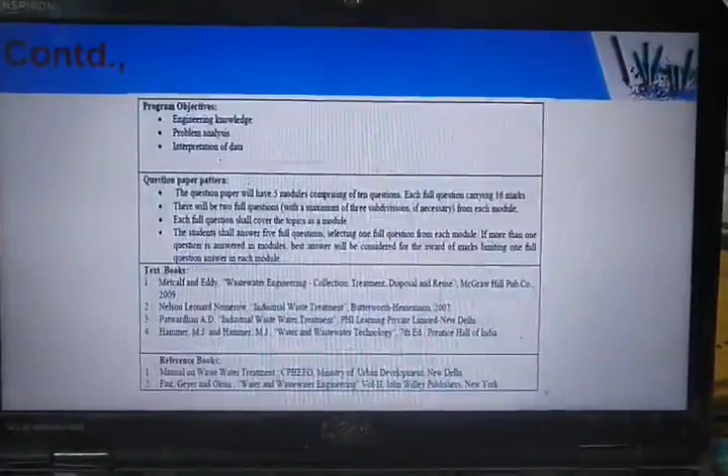Okay, so anyway, to begin with, in the previous class we have had an introduction about municipal and industrial wastewater engineering and some of the terms associated with municipal and industrial waste, the syllabus outline, the course objectives and outcomes. And we have gone through some of the basic definitions which are used in this subject. Just to have a quick review.

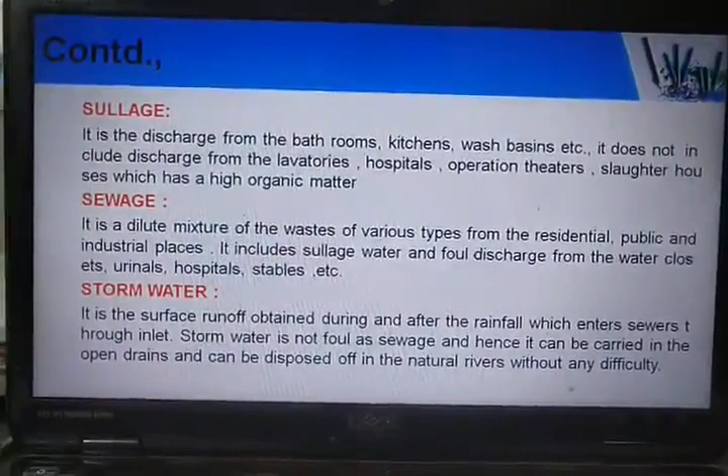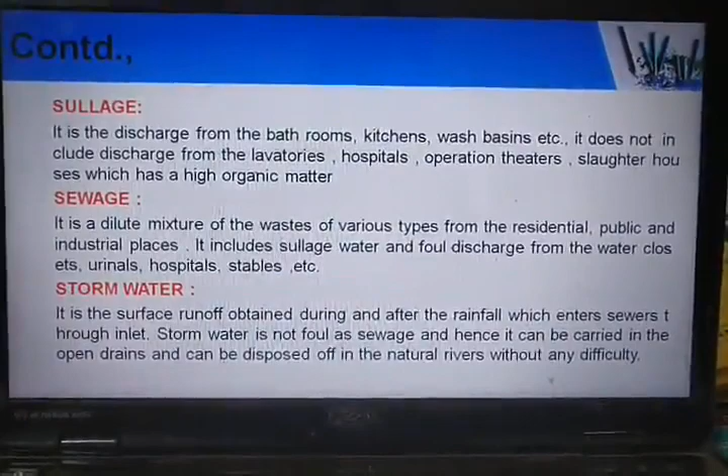Sullage, sewage and stormwater, you should know the difference between all these terms. Sullage is the wastewater which gets discharged from bathrooms, kitchens, wash basins, etc. Remember, it will not include any human and animal waste. Sewage is a dilute mixture of wastes of various types of residential, public and industrial places. It also includes the sullage water and foul discharge from the water closets, urinals, hospital waste, etc.

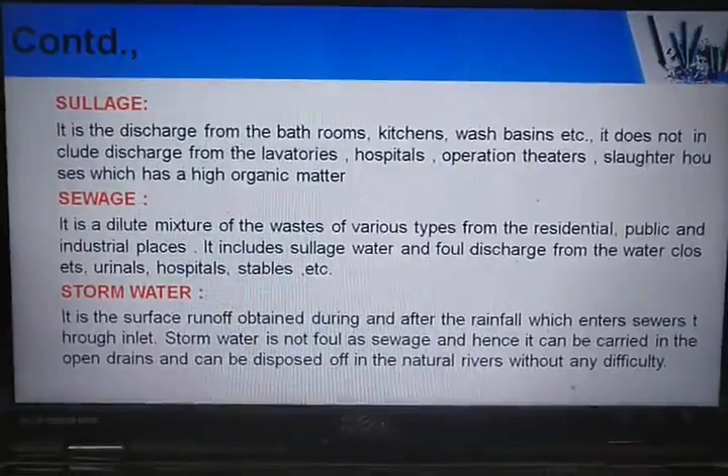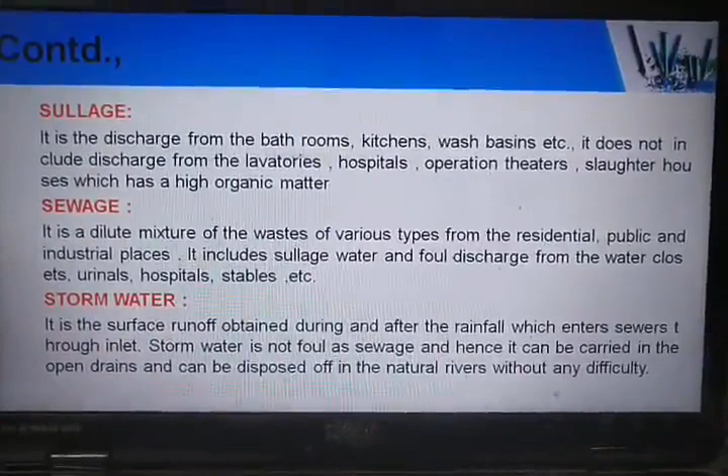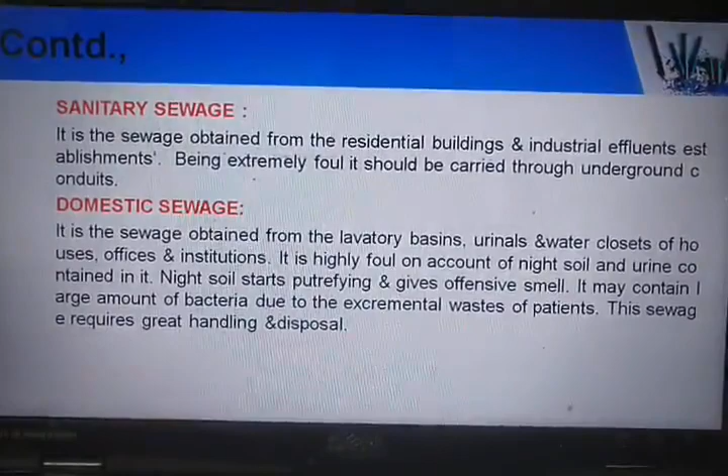Storm water is nothing but the rainwater which falls on the surface, and that has to be carried out using the stormwater sewers for its disposal. It will not contain any foul matter unless it gets mixed with the sewage. Another term is called sanitary sewage. It is the sewage obtained from residential buildings and industrial establishments, and it is extremely foul and it should be carried through underground sewage conduits only.

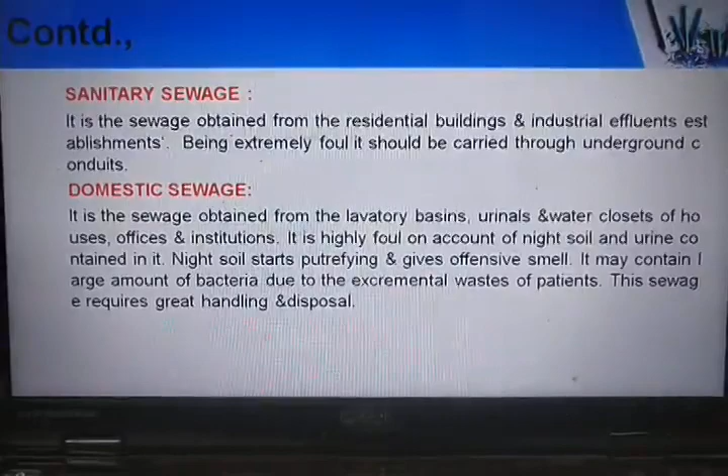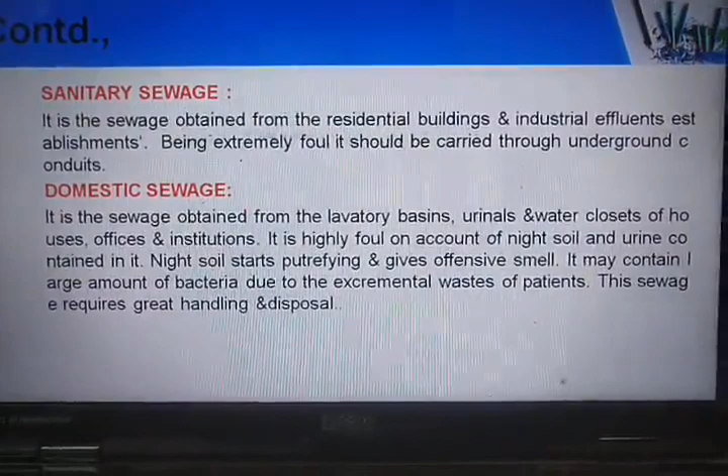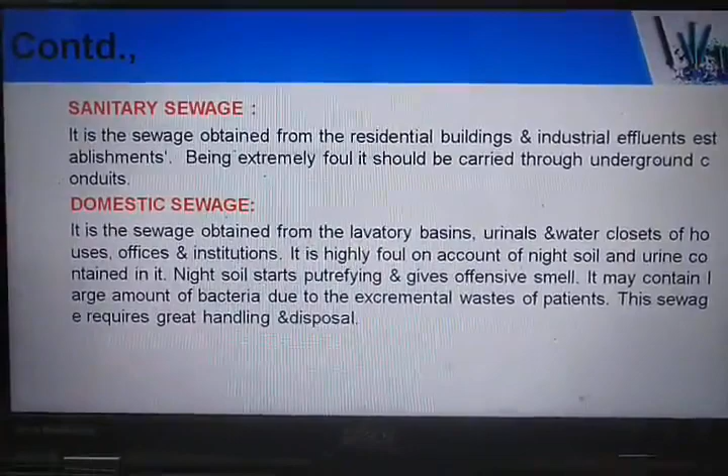Like I told you, the sewage or industrial wastewater is categorized based on the parameters or the organic load, how much load or pollutants it contains. It contains various physical, chemical and biological impurities. So based on that, the sewage has to be handled and treated carefully by following the norms of the pollution control boards.

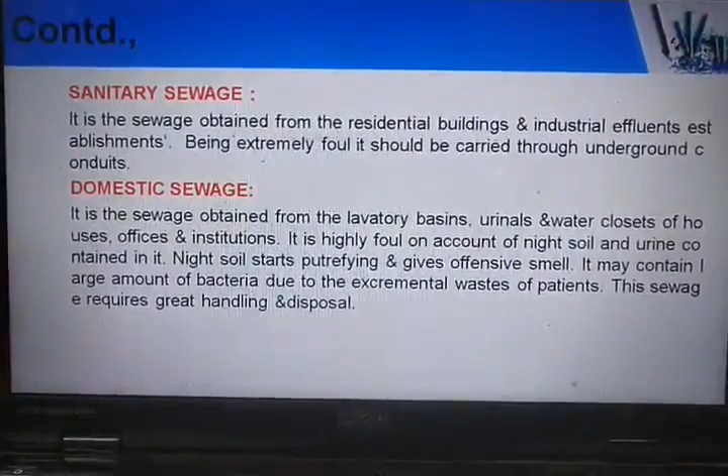Domestic sewage is concerned with the wastewater or sewage which is obtained from domestic purposes or individual houses. It contains the wastewater basically from the lavatory basins, urinals, water closets of houses and institutions. And it is highly foul due to the presence of night soil and urine. Night soil is nothing but human waste; technically it is called night soil.

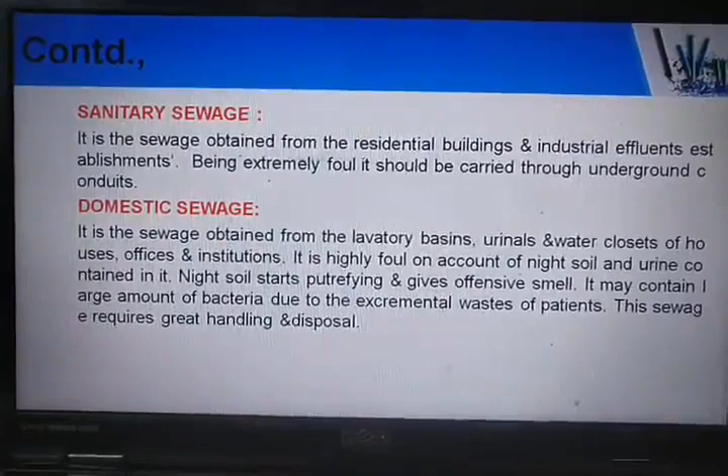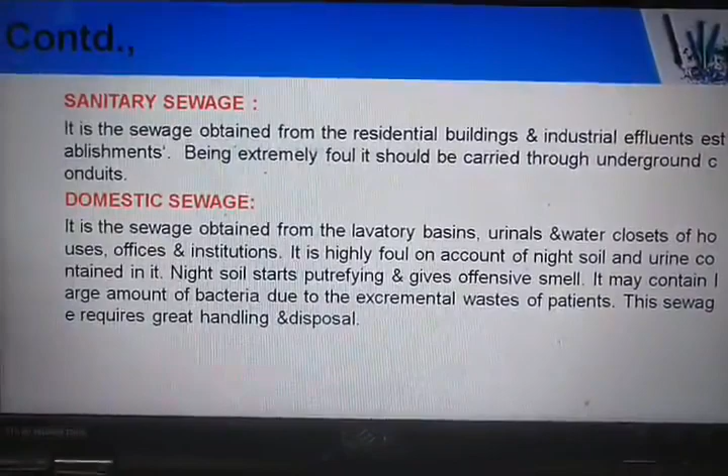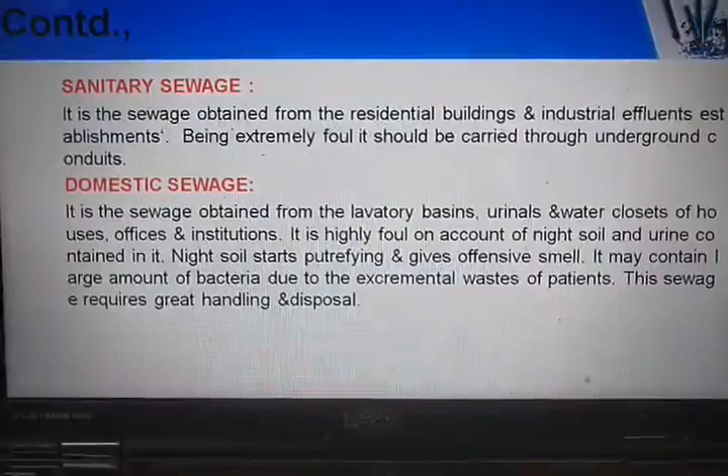As soon as it starts decomposing or putrefying, it gives a very bad odor and it will be very offensive, and it may contain a large amount of bacteria and viruses, and especially if this waste is discharged from patients, then it will be really challenging and difficult to treat effectively. As you all know, nowadays we are living in this world of COVID-19, so it is very essential to treat the wastewater effectively.

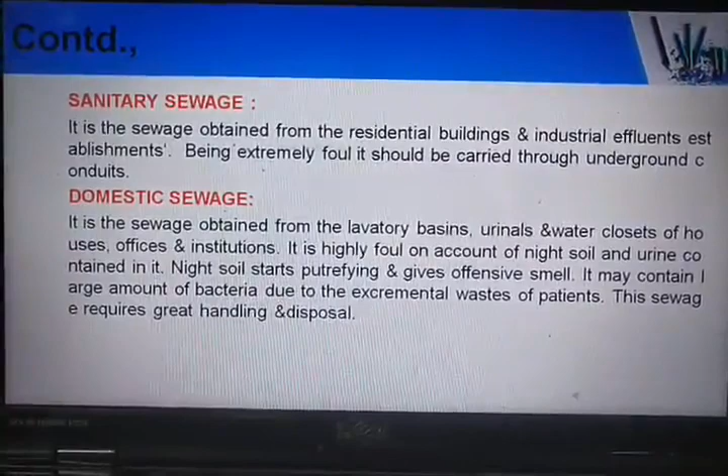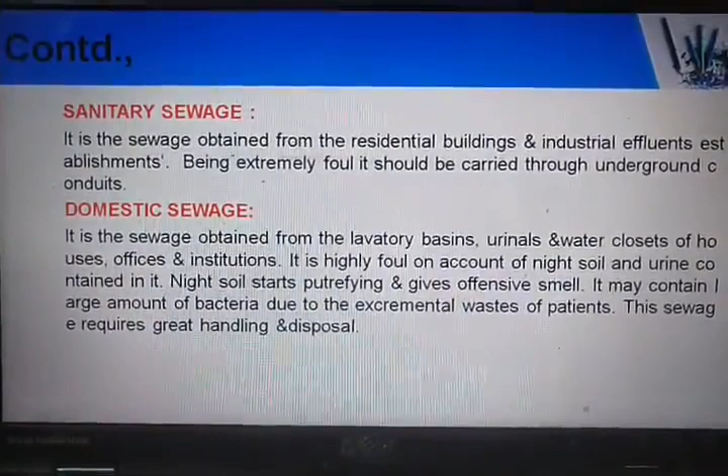And from recent studies, it has also been said that the COVID-19 virus is found in municipal sewers, that is the waste which gets discharged from patients or hospitals. So it is really a big concern for the whole world to effectively take care and to propose treatment technologies which will effectively kill this virus to prevent the transmission of diseases.

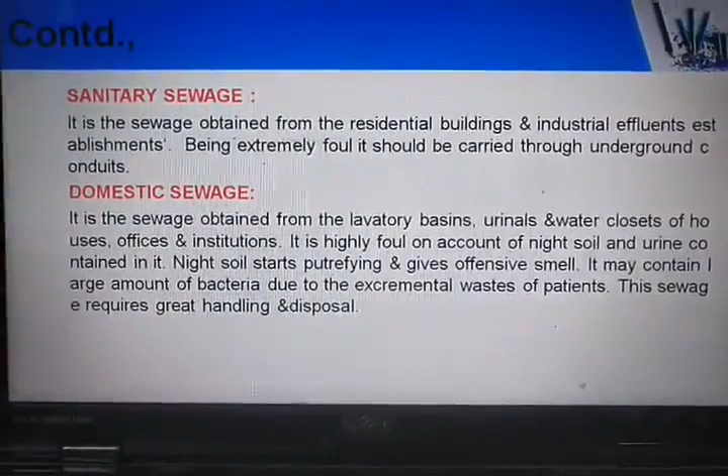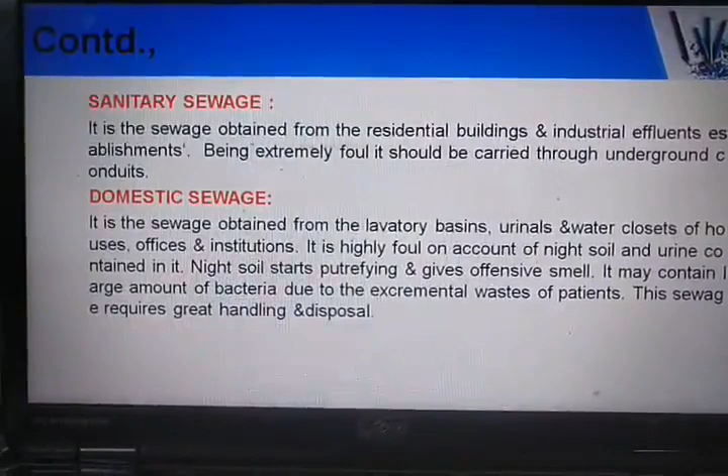Not only COVID-19, human waste will have millions and millions of bacteria, cells, cysts, etc., which have to be killed effectively in order to prevent the spread of communicable diseases. Like we studied in water treatment engineering, protozoa, helminths, different diseases caused by different microorganisms. Unless we remove them from water as well as wastewater, it is very difficult to maintain hygiene in the environment and the well-being of the people of a city or a country as a whole.

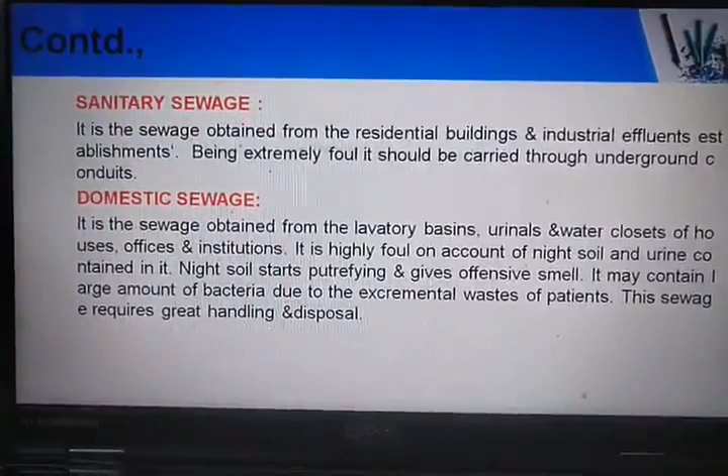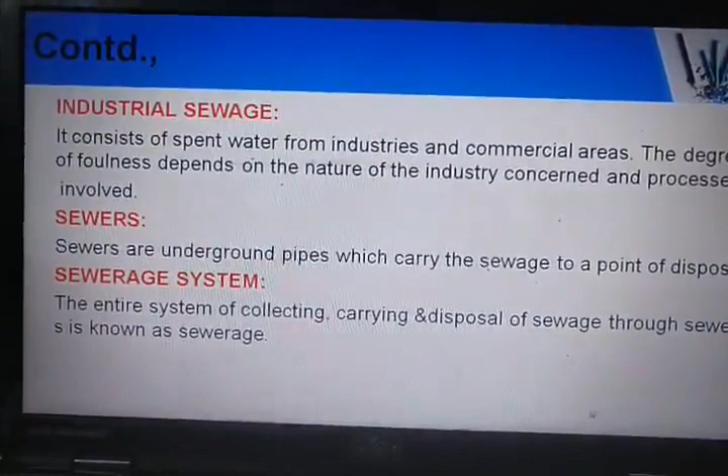Then coming to the term called industrial sewage. Industrial sewage is nothing but the wastewater coming from industries and commercial areas.

So this industrial wastewater is specific to specific industries. Usually the most common industries are the sugar industries, distilleries, leather industries, tanning industries, cotton and textile industries. This industrial wastewater depends on the processes being done in any particular industry. Depending upon the processes, the nature of raw materials and the nature of water used in these industries, the organic load and the parameters differ from one industry to another.

But chemically and biologically, this industrial sewage or industrial wastewater is toxic, both qualitatively and quantitatively. Quantitatively it may be less, but with regard to quality, it has a very high organic load in comparison with the municipal wastewater.

Then sewers are underground pipes which carry the sewage to the point of disposal. As you know, in water treatment we have studied the different types of pipelines and pipe material, like cast iron pipes, PVC pipes, plastic pipes, then HDPE pipes, high density polyethylene pipes.

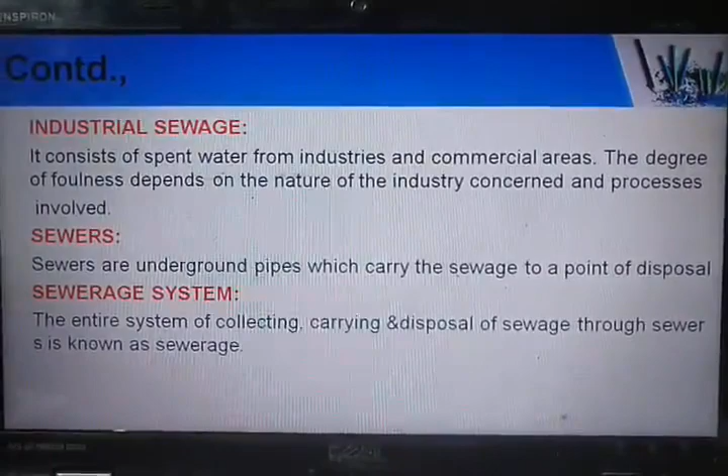There is a particular system called the sewerage system, which means that when you discharge wastewater from your individual house or an industry, it has to go through different systems of pipes and appurtenances. The entire system may include appurtenances like sewers, manholes, catch basins, street inlets, and oil and grease traps. All these units along with the sewers, from the point of generation to the point of ultimate disposal, are collectively called the sewerage system.

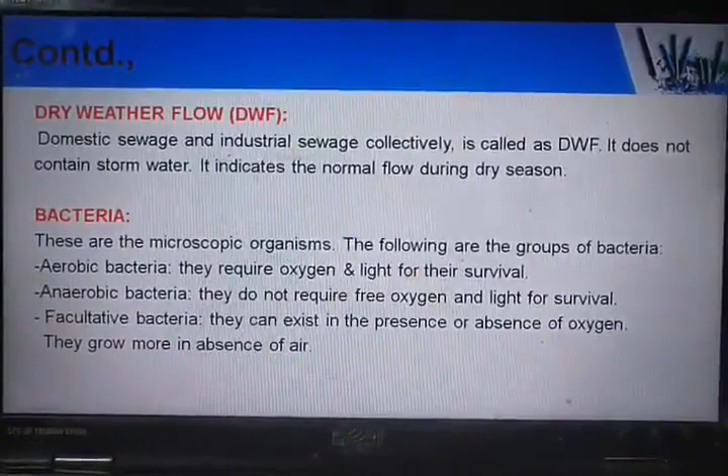Then these terms called dry weather flow and wet weather flow. Dry weather flow refers to domestic sewage and industrial sewage collectively. It does not contain storm water. It indicates the normal flow during the dry season of a year. Basically, while designing the sewers we include these terms, dry weather flow and wet weather flow.

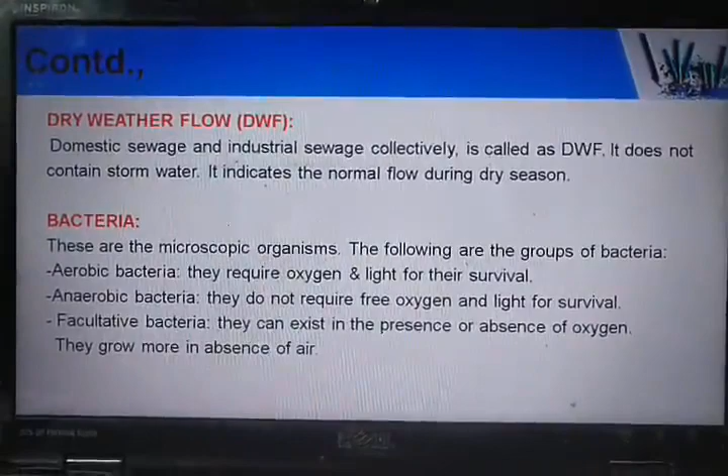Here dry weather flow refers to only domestic sewage and industrial sewage, excluding storm water or rainwater. So remember, dry weather flow means the flow during the dry period of a season. It does not take any storm water or rainwater flow into account. This factor has to be considered while designing the sewers. That is called dry weather flow.

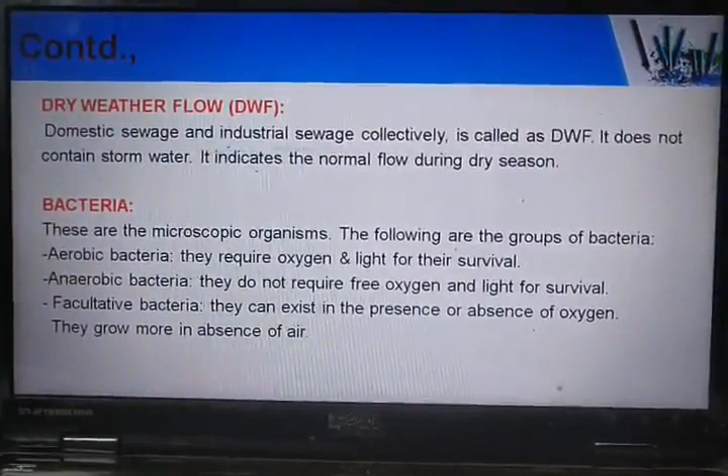And bacteria: as you know, there are any number of bacteria, viruses, protozoans and so on. Bacteria are microscopic organisms which are not visible to our naked eyes. Based on the oxygen requirement, they are classified as aerobic bacteria, anaerobic bacteria and facultative bacteria. Aerobic bacteria require oxygen and light for their survival, so these bacteria survive in the presence of air.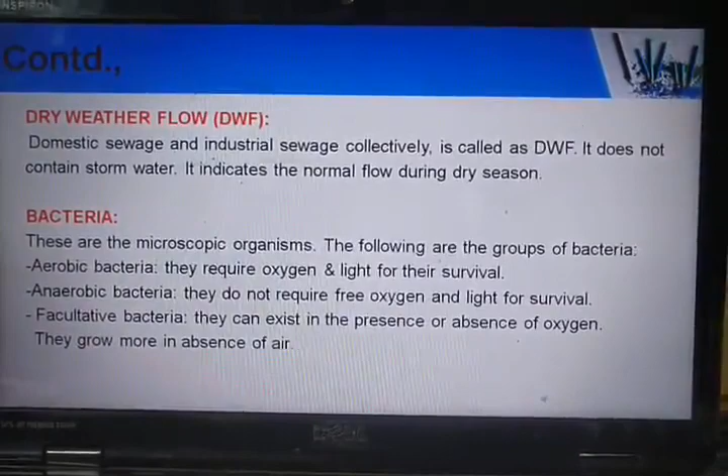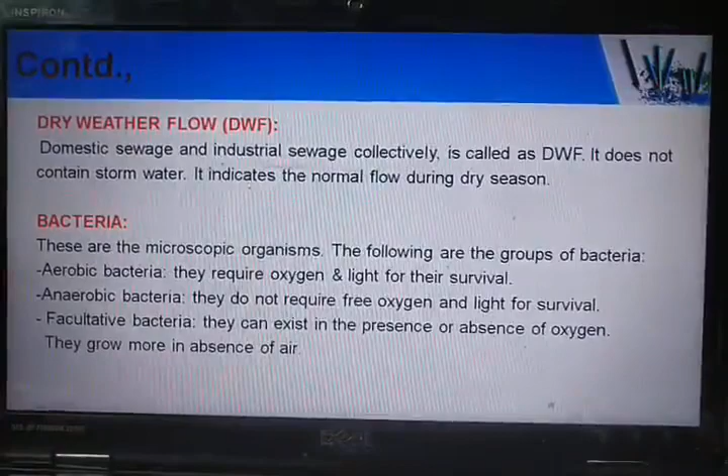Anaerobic bacteria do not require any air, so they can survive in anaerobic conditions. Facultative bacteria are a kind of neutral bacteria which can exist in the presence or absence of oxygen; they grow more in the absence of air. So there are three types of bacterial species here.

Then we have something called the invert. The invert is the lowest point of the interior of the sewer at any cross section. That is, if you take a sewer pipe, the lowest portion of the interior of the sewer is called the invert, and the level of the invert is called the invert level. This is required while laying the sewers.

So depending upon the invert level of the sewer, we will lay the sewer with respect to the designed gradient. Next we have something called sludge. Sludge is nothing but the organic matter which is deposited in the sedimentation tank during treatment.

Sewage contains water along with solid particles. Around 99% of the sewage is water and 1% of the wastewater is solids. As you remove water using different treatment processes, the remaining portion which remains in the sedimentation tank, or which gets settled in the grit chambers, in primary sedimentation tanks, in secondary sedimentation tanks, that organic matter

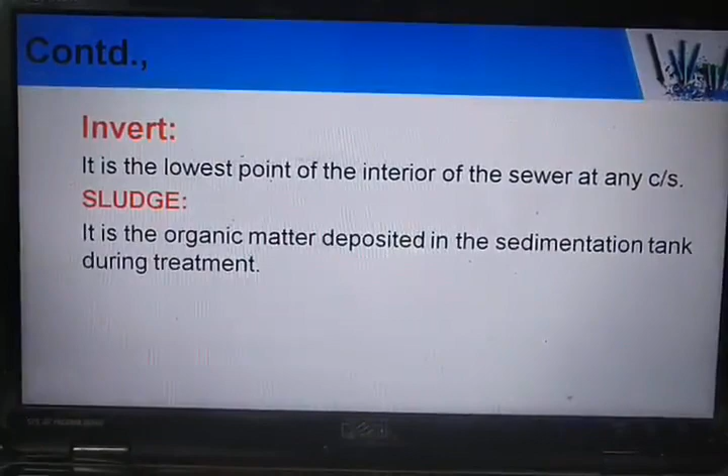is called sludge. It may be organic, it may be inorganic. Whatever is solid and settled at the bottom is called sludge. Usually more organic matter is present in the sludge compared to inorganic matter.

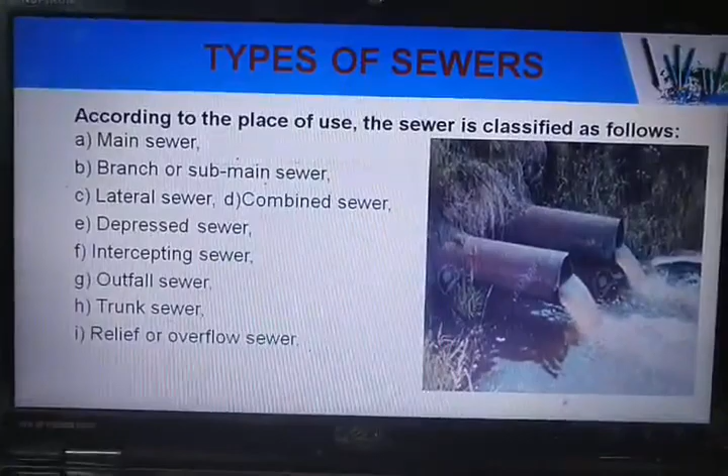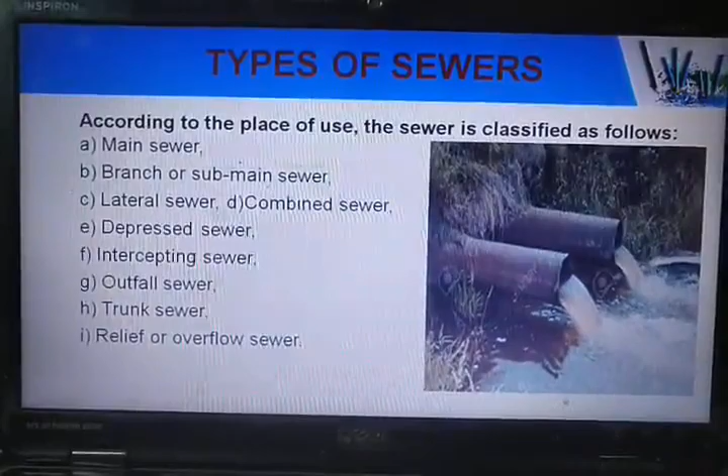Then coming to different types of sewers. Sewers are classified according to the place of use into different types: main sewer, branch or sub main sewer, lateral sewer, combined sewer, depressed sewer, intercepting sewer, outfall sewer, trunk sewer, and relief or overflow sewer. Now let us see one by one what these types of sewers are.

A main sewer is the one which obtains its discharge from a few branch or sub main sewers. A branch or sub main sewer is the sewer which obtains its discharge from a few laterals and delivers it to a main sewer.

A lateral sewer obtains its discharge directly from buildings. That means the sewer from your house which connects to the municipal sewer or municipal appurtenances is called the lateral sewer.

Then we have the combined sewer. There are different types of sewerage systems, separate, combined; we will talk about it later. As of now just understand that the sewer which carries the sewage and also the storm water is known as a combined sewer, that means the dry weather flow and wet weather flow together.

Then we have something called the depressed sewer.

Sometimes people also get depressed, so the sewer is also depressed. It is not the other way. On a lighter note, I just told you.

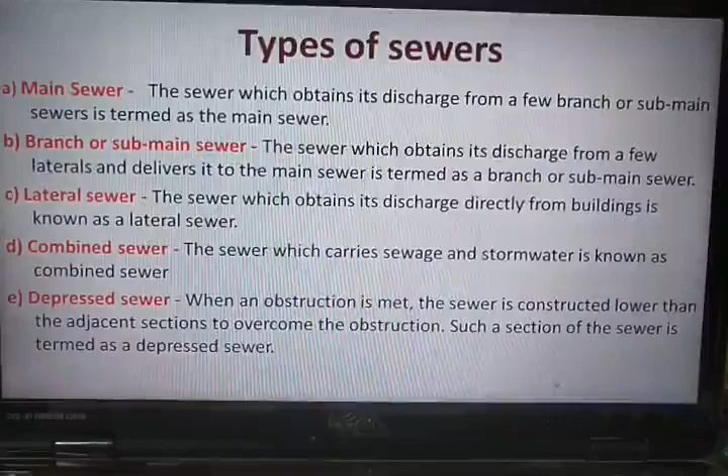The depressed sewer is the one used when we have any obstructions. The sewer is constructed lower than the adjacent sections to avoid the obstruction. That is called a depressed sewer.

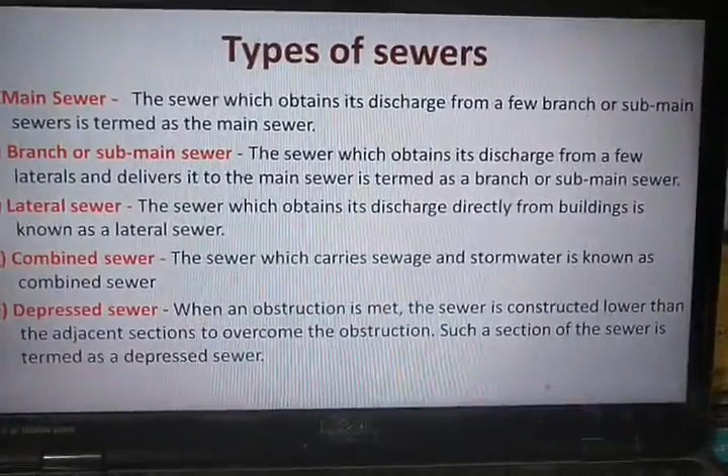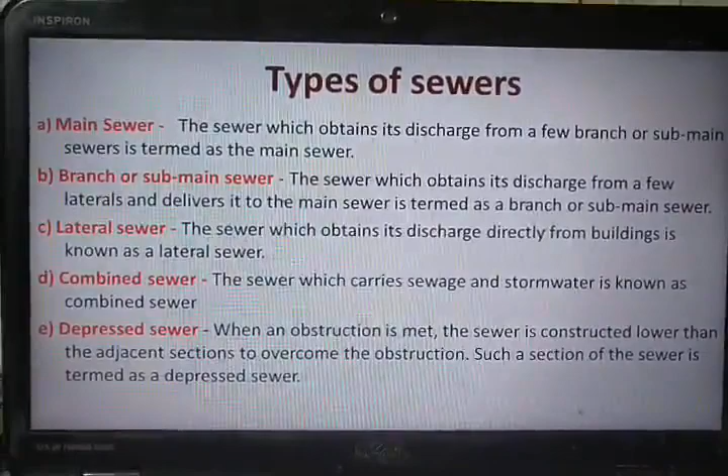That means you may have a railway track or any obstruction in the midway or any important structure. In that case we have to take the sewer in a depressed way and connect it back again to the next level of the sewer. That is called the depressed sewer.

Then we have the intercepting sewer. The sewer which obtains the discharge from a number of main or outfall sewers and carries the same to the point of treatment and disposal is termed an intercepting sewer.

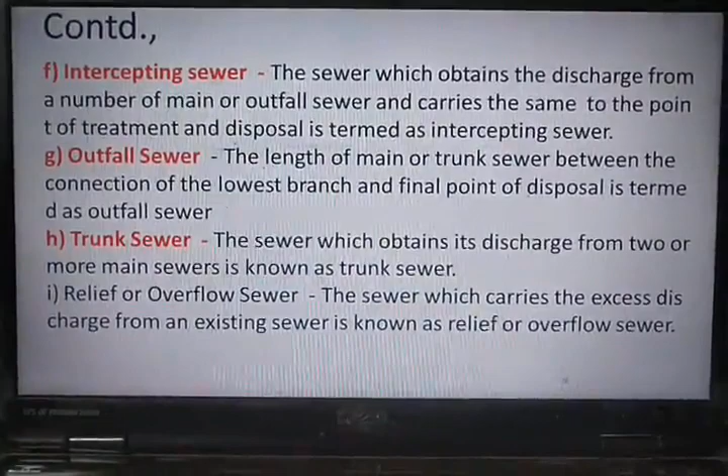Then we have the outfall sewer. The length of main or trunk sewer between the connection of the lowest branch and the final point of disposal is termed the outfall sewer. Generally this outfall sewer is located at the last end of the treatment processes.

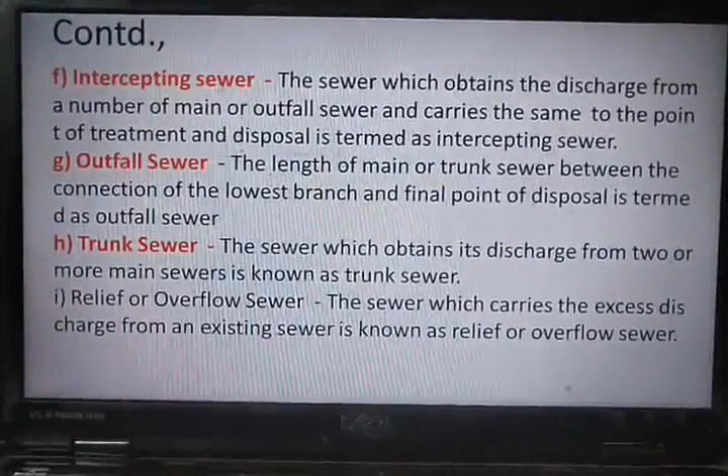That means when you have a treatment plant, after the treatment we have to discharge this sewage into the river or onto the land. That last portion of the sewer we call the outfall sewer.

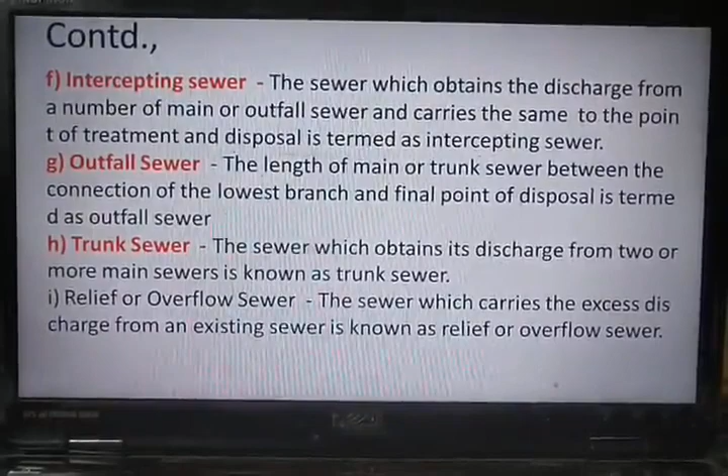Then we have the trunk sewer. It is nothing but the sewer which obtains its discharge from two or more main sewers. It is relatively bigger because it receives the discharge from two or more main sewers.

Relief or overflow sewer: the sewer which carries the excess discharge from an existing sewer is known as a relief or overflow sewer.

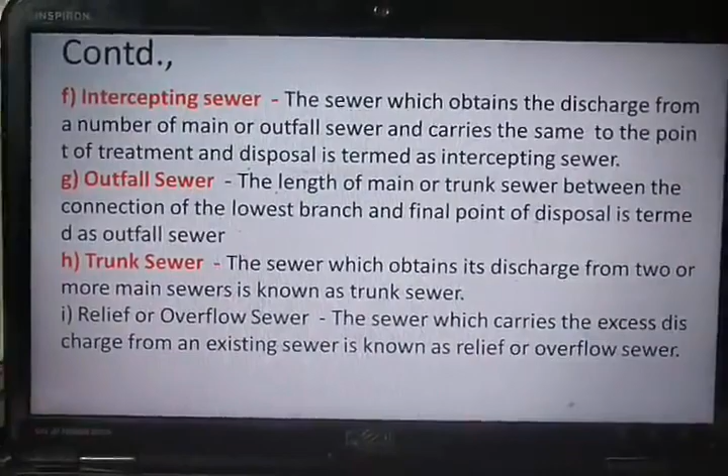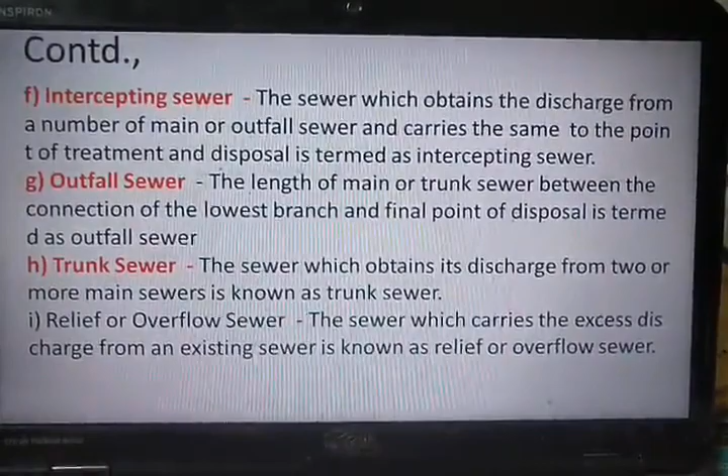Sometimes the sewerage system is designed for a particular capacity. So during excessive rainfall, or due to excessive flow from particular incidents or accidents, or for some other reason, the sewer may overflow. In that case we may have to have an overflow sewer or relief sewer which carries the excessive discharge in order to prevent problems in the sewerage system.

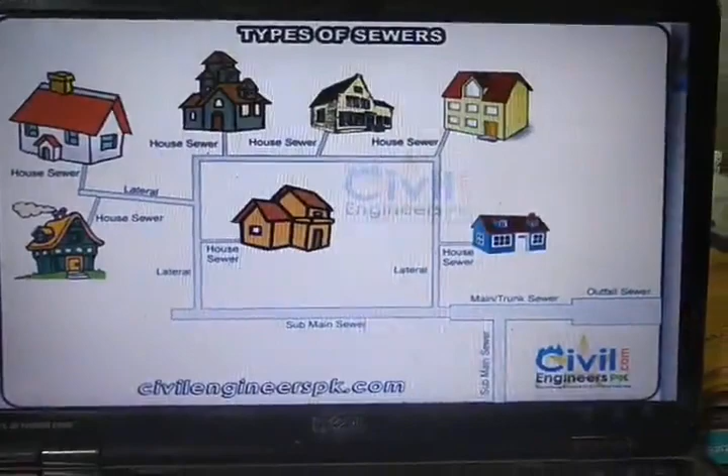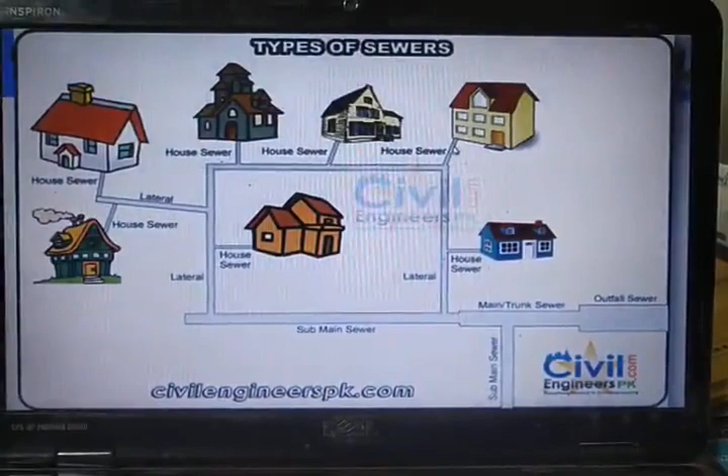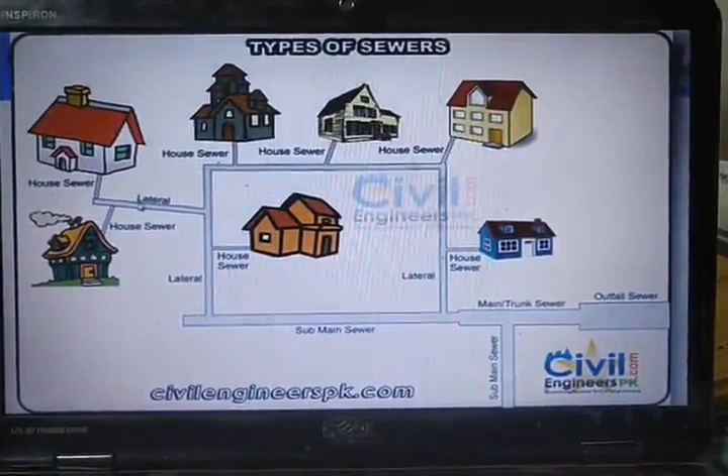In this diagram you can see the different types of sewer so that you can understand it better. As you can see, there are different houses here. The individual sewer which connects from the house to the sewerage system we call the house sewer, or the lateral. From your house sewerage system we have to connect through an intercepting trap to this sewerage system. The sewer which connects the house sewer to the sewerage system is called the lateral.

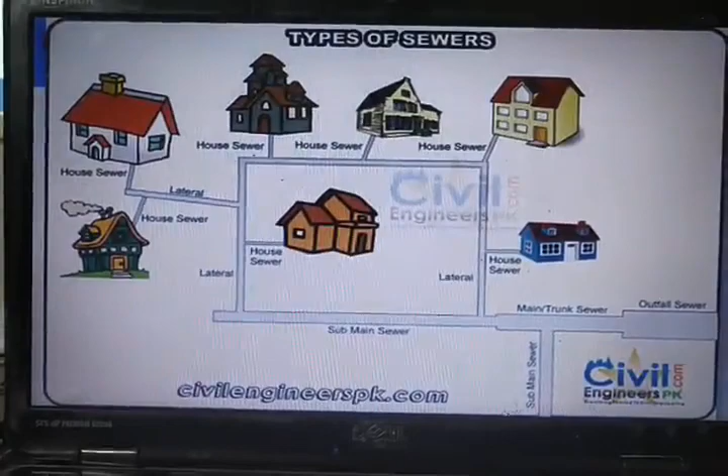As you can see, these many laterals discharge their sewage to the submain sewer. These are the different laterals discharging into the submain sewer. These submain sewers again discharge into the main sewer or the trunk main sewer. Here you can see another submain sewer running from a different locality, on the opposite side of this lane.

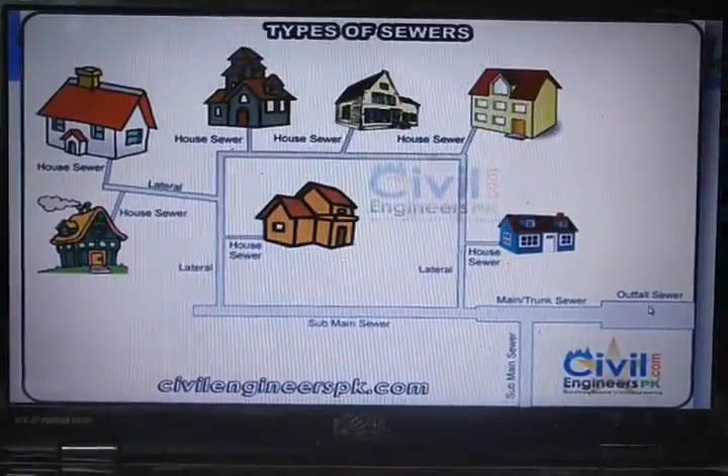Ultimately all these submain sewers and main sewers discharge into this outfall sewer. Here you may have a treatment plant, or in some cases, if you don't have a treatment plant, the ultimate point of sewage disposal is this outfall sewer. I hope you have understood from this diagram the difference between lateral, submain, main and outfall sewer.

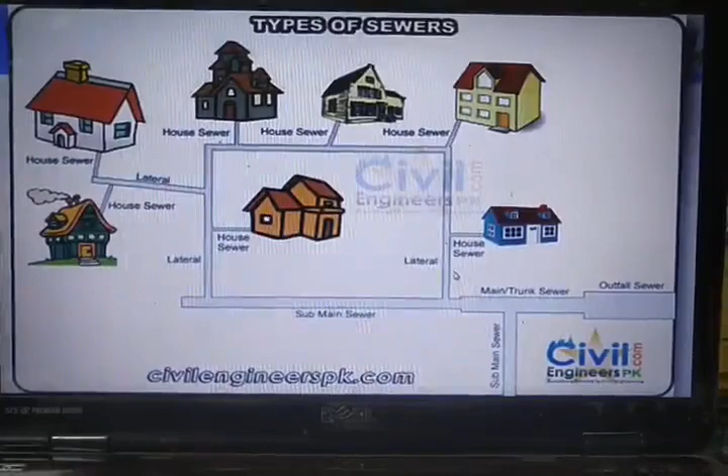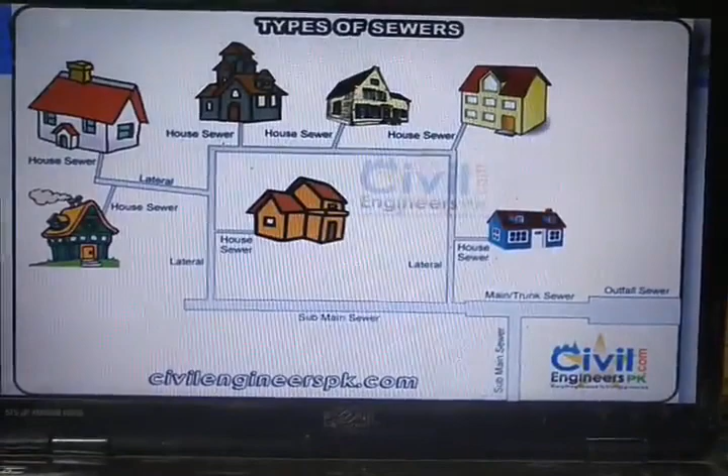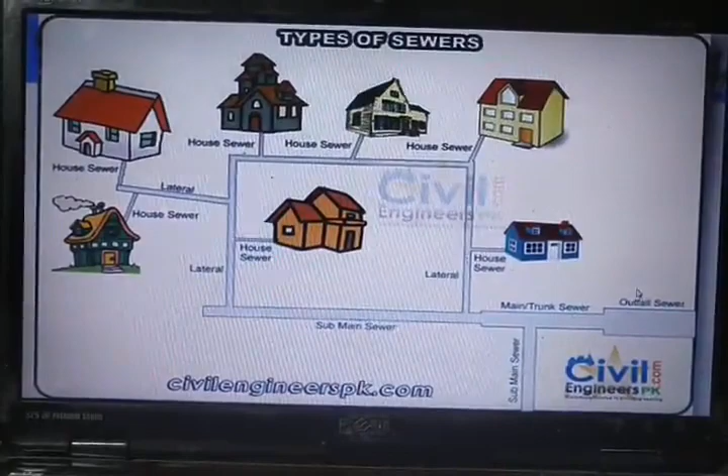If you observe closely, the size from the lateral sewer to the outfall sewer goes on increasing. That is the important observation you should make. It is for the obvious reason that many laterals feed into the submain, and similarly many submains discharge into the main sewer. That's why the size is relatively bigger, and many main sewers from different localities discharge into the outfall sewer. That is how the size increases from the lateral to the outfall sewer.

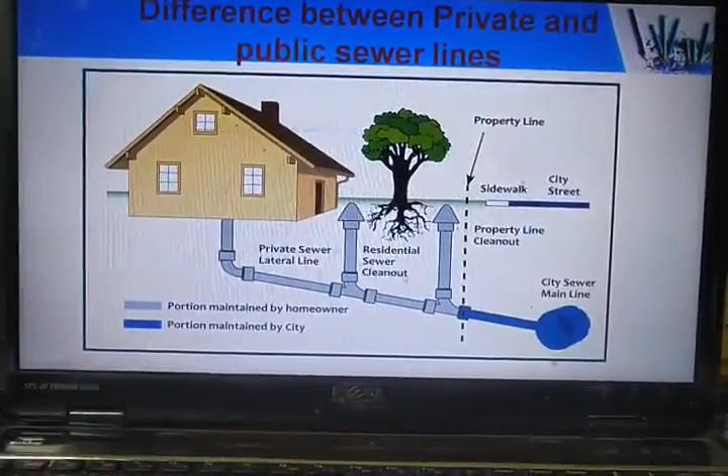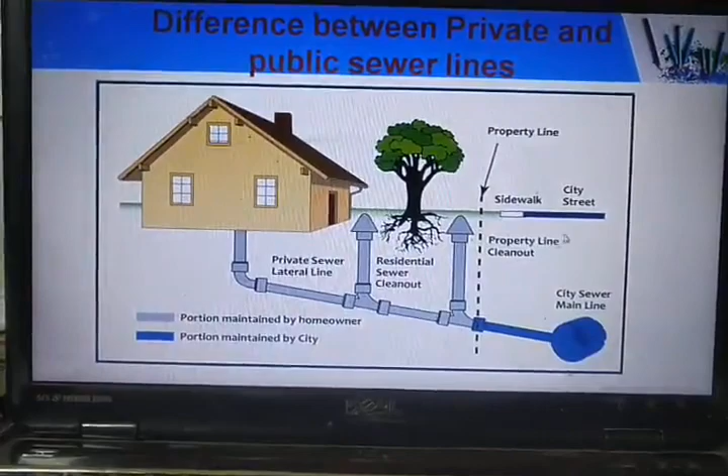This is called the property line. Within this line, whatever appurtenances are arranged are made by the house owner, depending upon his requirement and capacity; he can install the pipelines and cleaning devices. And this part is maintained by the municipality or local corporation. From here the city sewer main line comes into the picture, and the line goes on as the submain, branch, main, and ultimately to the sewage treatment plant.

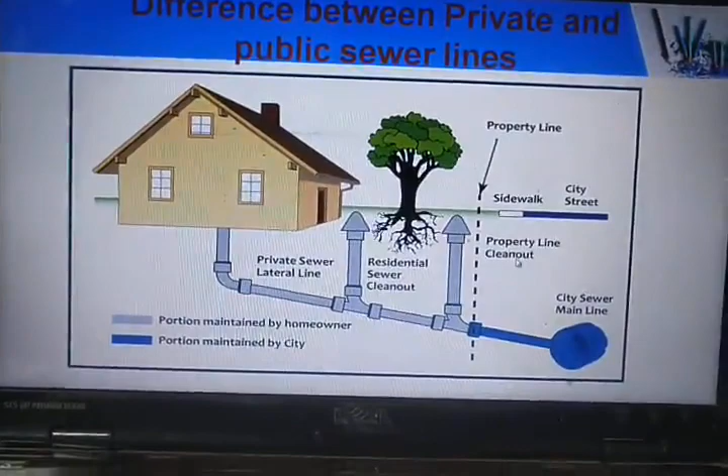So whatever planning and arrangement has to be made within this property line is the house owner's responsibility, so that he can plan it accordingly.

Then, the difference between water supply and sewerage system. It has been asked in the VTU exam. Water lines are used in the water distribution system to supply residential and commercial buildings from reservoirs and large water storage, whereas sewer lines are the drainage pipes which connect your home to the sewage treatment plant.

Coming to the next difference, since water flows in these pipes, clogging problems do not occur in them. But because water flows with high pressure, leakages are common in water supply lines. Whereas in sewerage systems, along with water you also have mud and other particles, so it may clog your pipelines.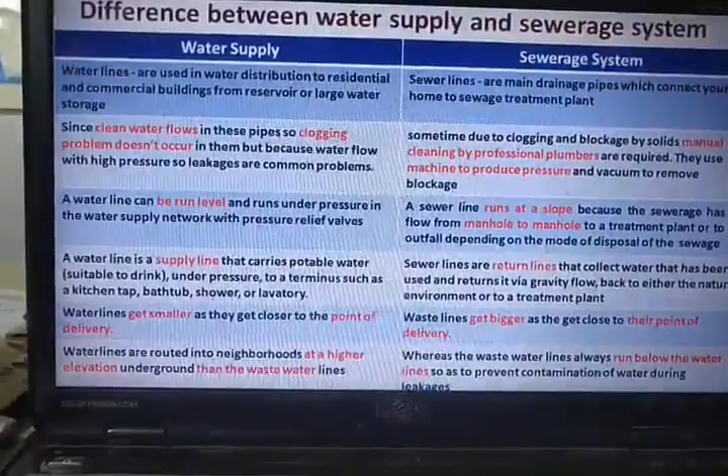They use machines to produce pressure and vacuum to remove blockages. This means we may have to frequently monitor the sewers for possible blockages and other things which damage the sewerage system. A water line can run level and runs under pressure in the water supply network with pressure relief valves, whereas a sewer line runs at a slope because the sewage has to flow from manhole to a treatment plant or to an outfall depending on the mode of disposal.

That is the major difference between water supply and sewerage lines. In sewerage systems you can find manholes, whereas in water supply lines you don't find any such manholes, but you find different types of valves to maintain the pressure in the system.

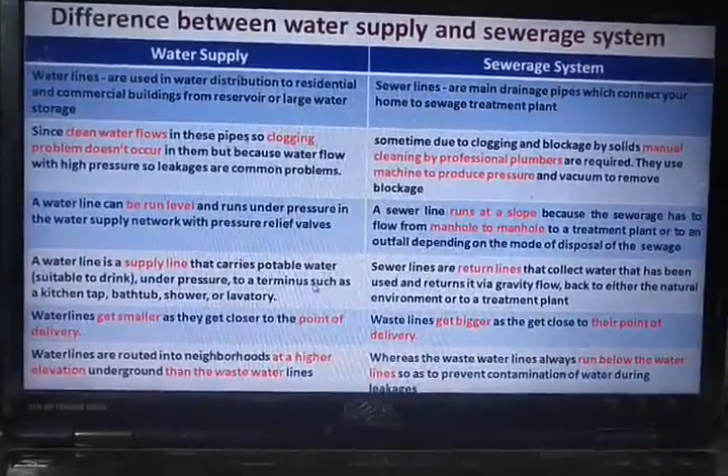A water line is a supply line that carries potable water, that is water fit for drinking, under pressure to a terminus such as a kitchen tap, bathtub, shower, or lavatory. Sewer lines are the return lines.

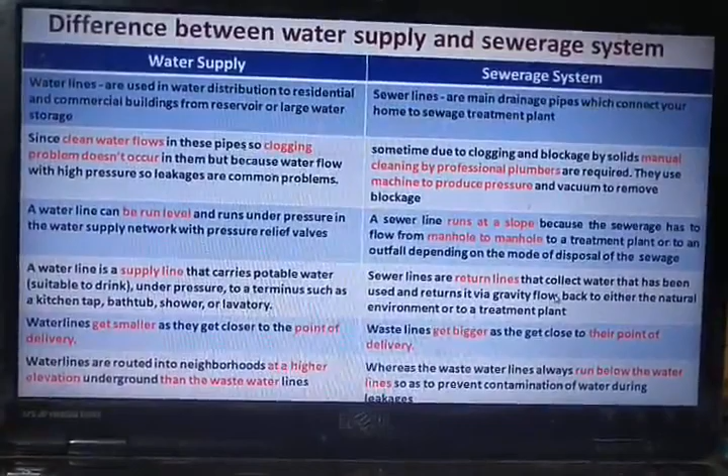It is called a return line because after usage we have to discharge that water, that is wastewater, so that is why it is called the return line. The return lines run through gravity flow and back to either the natural environment or a treatment plant.

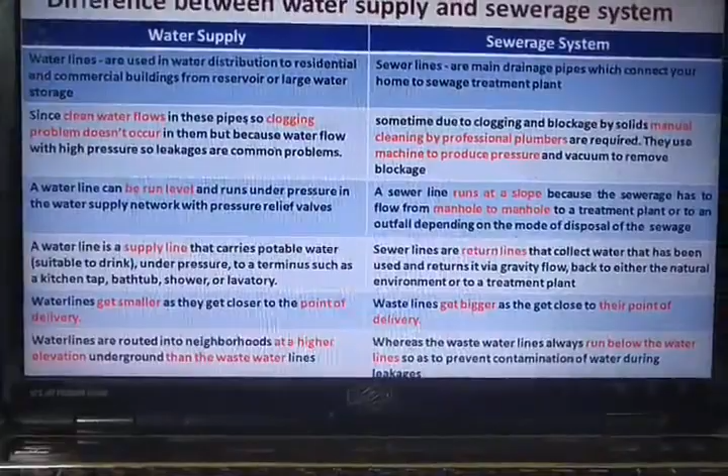Nowadays every city is going for or planning a wastewater treatment plant, whereas for smaller communities in most parts of rural India, we don't have wastewater treatment facilities, maybe due to less discharge or a shortage of funds. But nowadays it has become necessary to treat the wastewater.

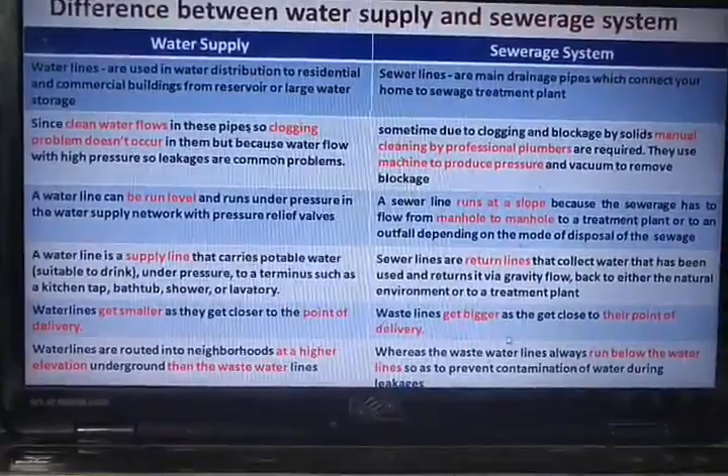Water lines get smaller as they get closer to the point of delivery. Here waste lines get bigger as they get closer to their point of delivery, so this is the reverse of the water supply lines. As you noticed in the earlier slides, the sewer size goes on increasing as it moves from laterals to the outfall sewer.

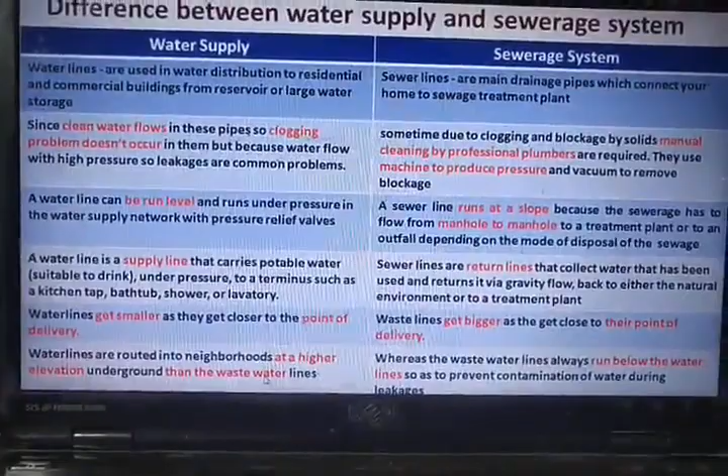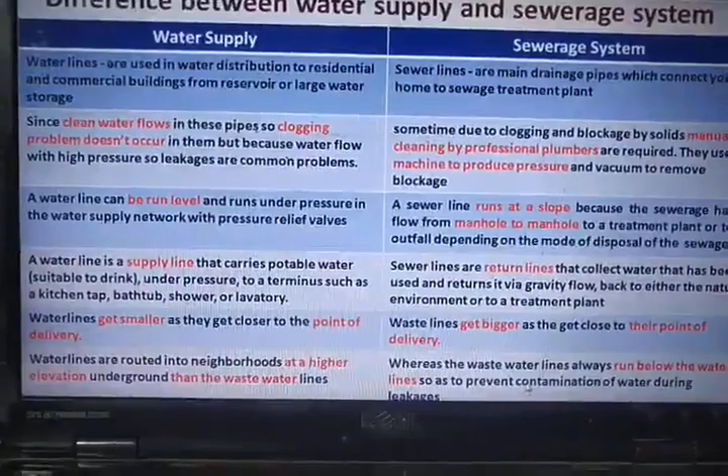Water lines are routed into neighborhoods at a higher elevation underground than the wastewater lines, whereas wastewater lines always run below the water line so as to prevent contamination of water during leakages. This is for the obvious reason that whenever you lay underground pipelines, the waste lines should run below and water supply lines should run above.

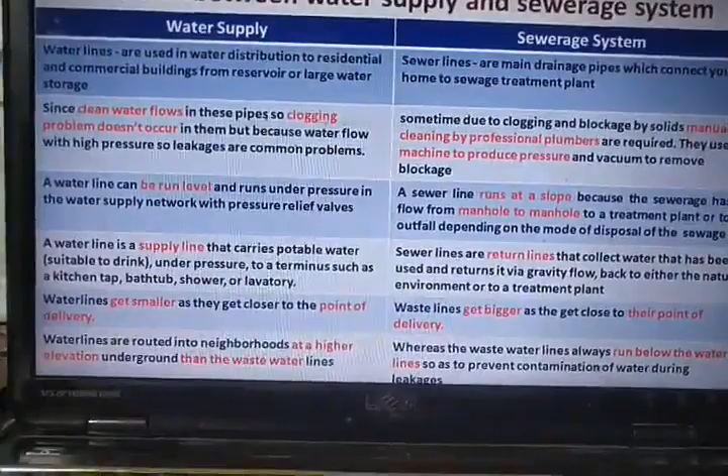This is to prevent contamination, that is, even if some leakage happens from the wastewater pipes or sewage, it should not contaminate the water supply lines. We have learned some basic definitions regarding water supply and wastewater lines.

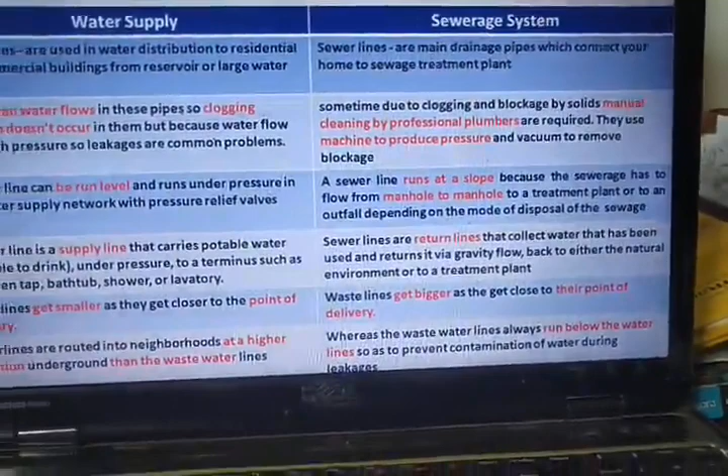This is the trend here, that recycling wastewater is a recent trend these days. Unless we recycle, it is very difficult to survive in future times, because as you know, water resources are getting scarce day by day. We have learned so many parameters.

Let us have a small video clip so that you come to know how this wastewater is treated, taken from your individual house ultimately to the points of its disposal. Our routine daily activities include usual toilet flushing, bathing, and all.

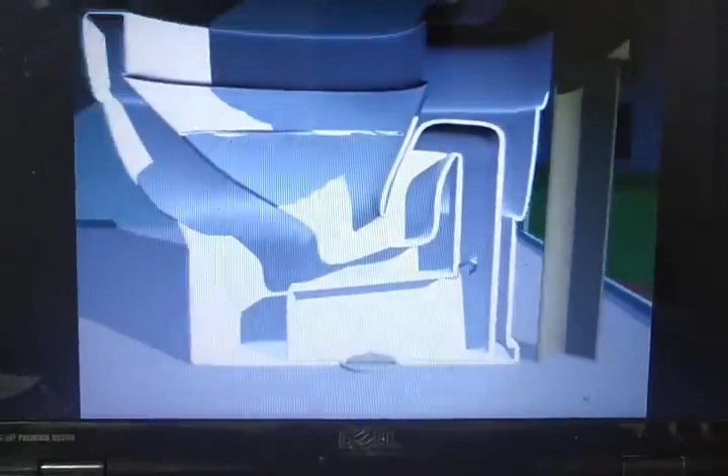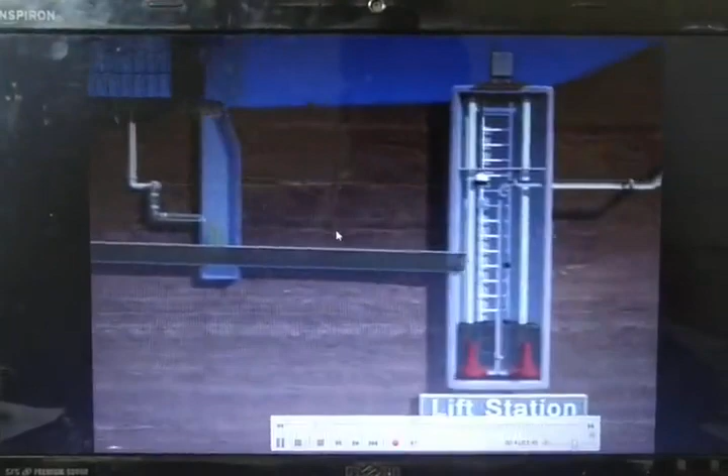This is an illustration of sewage treatment and disposal. As you can see, the wastewater is discharged, and this is a gravity sewer which collects the wastewater from individual houses. This is how it gets collected from the individual houses, and this is called the lift station, from where it is lifted.

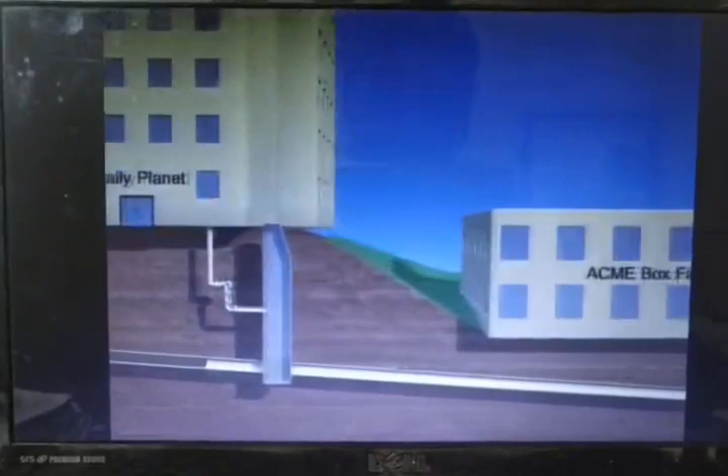And this is a SCADA operated plant, that means it is giving signals to...